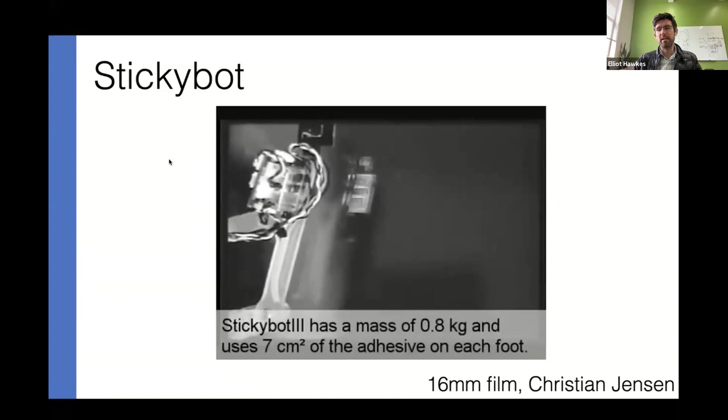So this is StickyBot, and StickyBot is inspired by geckos and their ability to grasp surfaces, and this is where my work began. And here's another version, a little smaller, a little stronger. This is pulling my computer up the wall. But what we realized was that these materials were able to grip in a way that's not normally used in robotic gripping.

So this is a close-up of the gecko-inspired material, where it's this very fine hair-like structure, about 100 microns long, that touches the surface, and when you apply a shear load, it grips the surface. So what's neat about it is that it's different than traditional friction that we're used to using when we do grasping, or most robotic grippers do.

So this is a friction cone here. We have the normal force, which is down, and then the shear force, which is the side. And a friction cone, basically, as you move around like this, you won't slip, and then if you go too far, it'll slip out to the side. But in contrast, you can have a sticky material. This is something that goes below the axis in the normal force, so if you pushed it down, it would actually stick.

And the cool thing about the gecko adhesive is it looks like this. So here what's going on is basically as you apply more shear force side to side, you get adhesion, below the x-axis. And what we realized is from the climbing robots that we saw this behavior, and we thought, well, what could this mean for grasping? This is an interesting material that could enable new types of grasping, and so that's why we got excited by it.

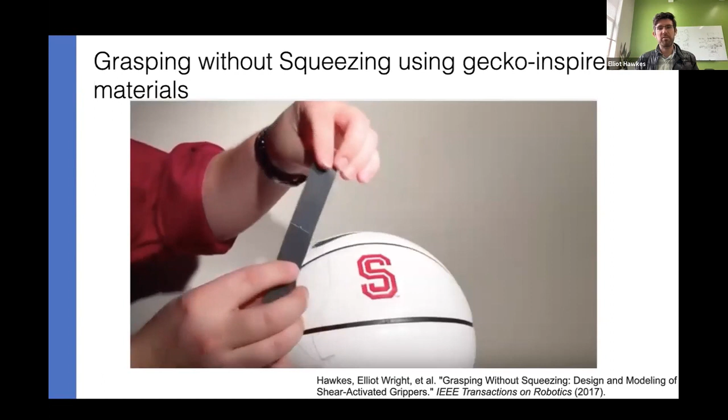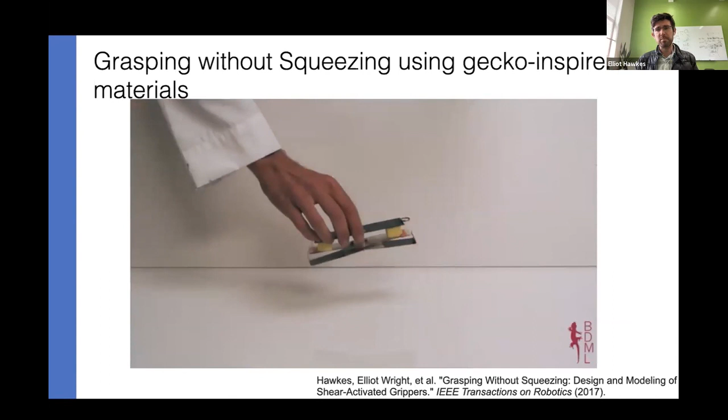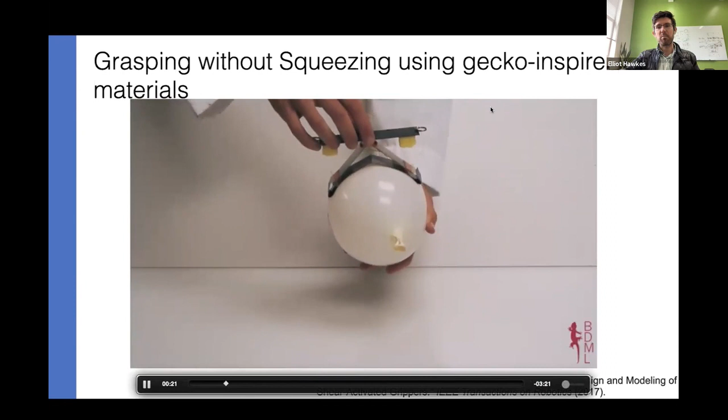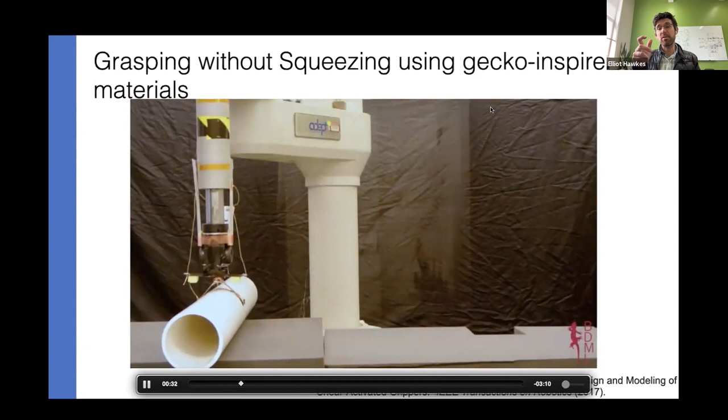Just here's some examples of it in action. It's just a film of it. You can set it on a material, and then when you pull that shear force, it grips, and when you release it, it falls off like that. I'll move on now. I have lots of videos of this thing picking lots of things up, but we'll probably have lots of those for today later on. So maybe I'll stop there. But the key takeaway was that with a new material, the forces enabled in the grasp became different, and that meant we could do things like pick stuff up without really squeezing it, which is kind of cool.

Thanks, Elliot. So Tess, as someone who's been working at the intersection of AI and novel materials for robotics, what do you see as the connection between materials and the data-driven techniques you've been using?

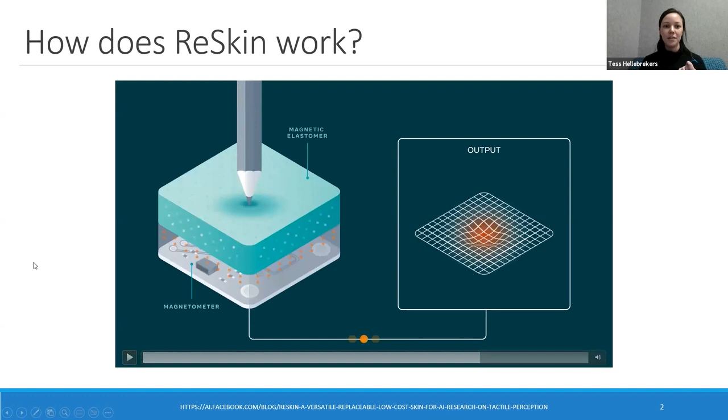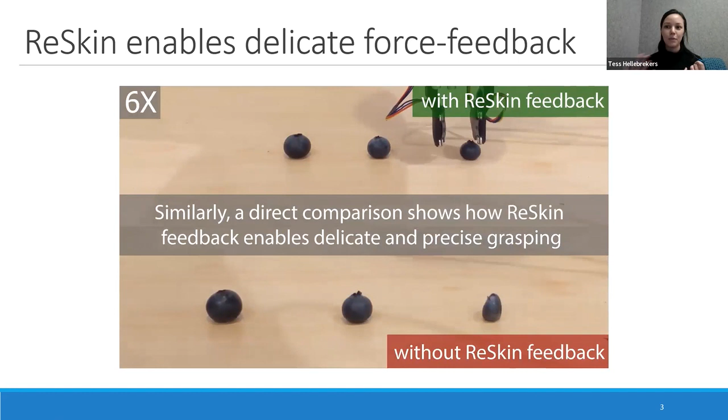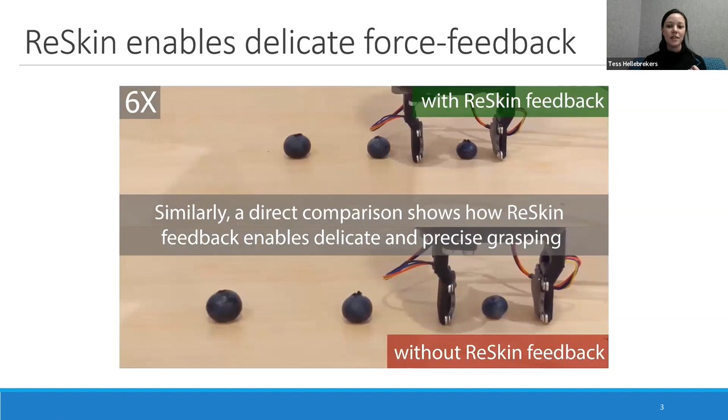Thanks for the intro, Carmel. I've prepared a few slides and videos. I work in soft sensing, and in the last couple years I've narrowed down on magnetic soft sensing. Some of my most recent work, called ReSkin, works by letting deformation of magnetic particles create a unique magnetic flux field. This led me into the data-driven side of things, since there's no closed-form solution for this kind of sensing. We're interested in how we can collect magnetic tactile feedback in robotics, wearables, and unstructured environments, and then use data-driven methods to make sense of it, so we get an interpretable, understandable output from raw sensor signals.

Some of my favorite work happens in a very unstructured way. We know we can put these compliant materials on tons of surfaces, and my next step is figuring out how to interpret all of that data into something useful for our communities.

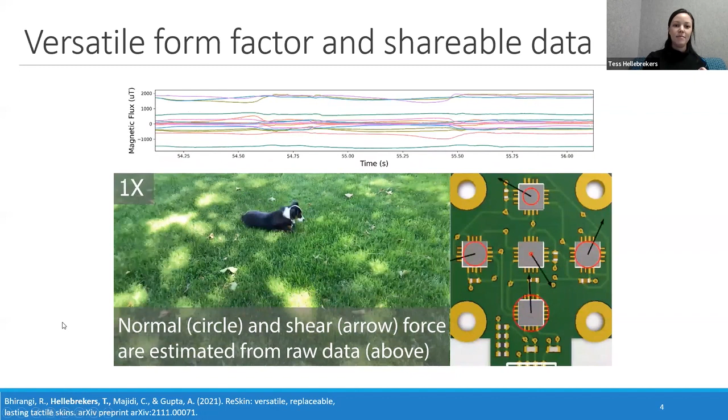Thanks, Tess. It's going to be interesting to share different perspectives on the role of sensing with these soft material systems. Thanks for sharing that.

All right, Nancy, you've been working on a series of soft hand designs, not just for grasping but also for manipulation. I'm curious, from your perspective, what you found to be easy versus hard with manipulation using these soft hands.

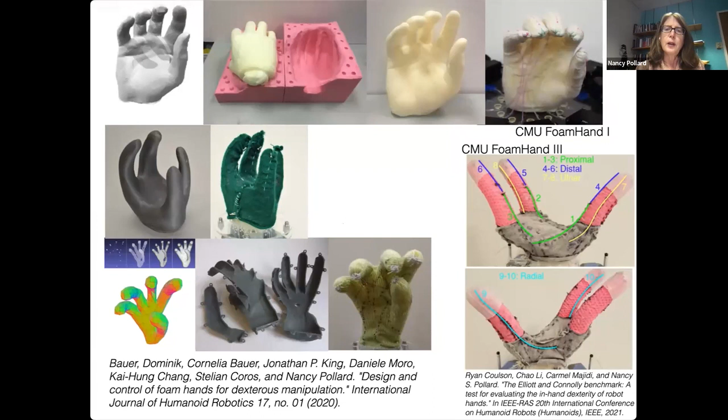Thanks, Carmel, for the introduction and the great question. With our first generation of hands, shown here, made of expanding foam based on a mold system, they were fully solid soft materials. What we found surprisingly easy was creating robust in-hand manipulations. I'll show you a bit of that.

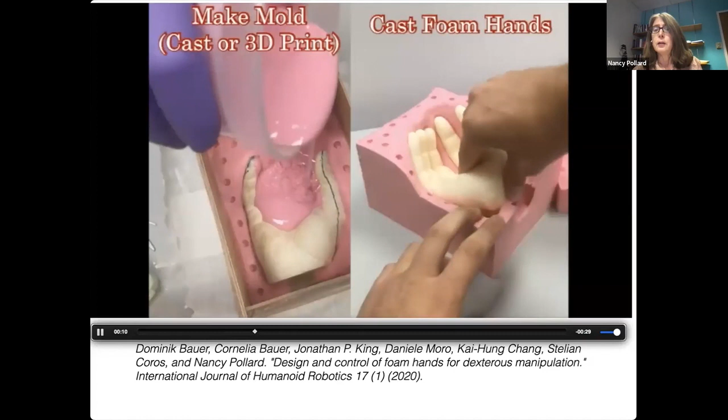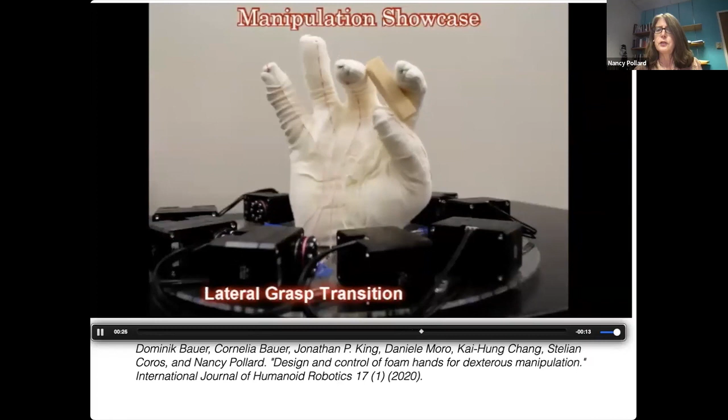It's not just about being able to create the manipulations, but we could change the design of the bodies, change their rest shape, change the tendon layout to make it more human-like than standard robotic designs, using the same foam that might be in your couch. Then we put a glove on it and sewed tendons through that glove. The inherent compliance made it easy to create these grasps and manipulations, since we didn't have to worry about fingers colliding or anything breaking, and interactions with the environment became more robust and secure.

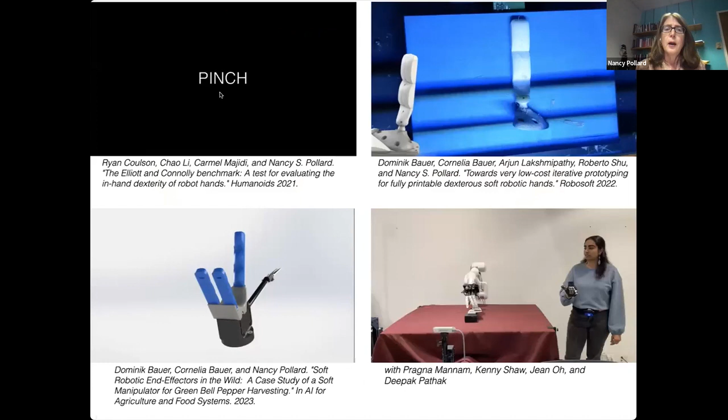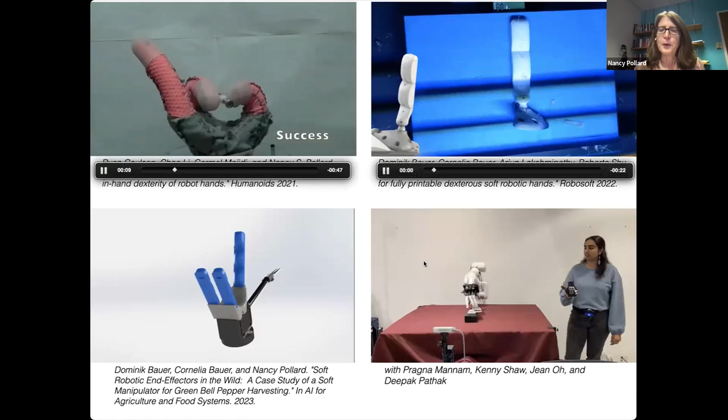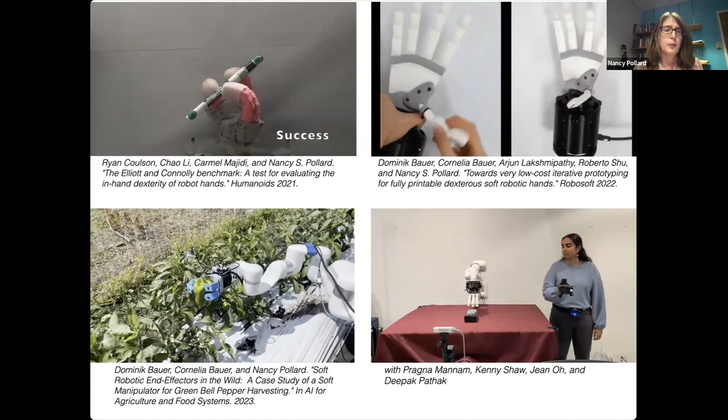Following that, we moved to systematizing this a bit, thinking about benchmarking it—this is work with Carmel and one of his students, so you'll know that one well. Then we moved in a different direction, toward a more rapid design pipeline based on 3D printing, incorporating an almost recognizable joint structure into these hands, with the goal of better controlling the low-stiffness and higher-stiffness directions of motion.

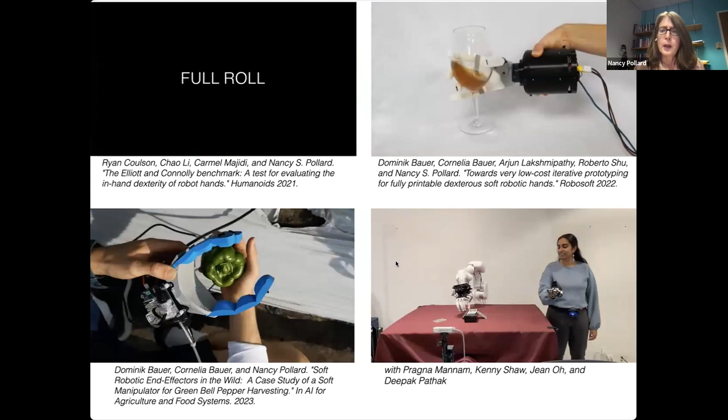This footage in the lower right is from our lab just a few days ago. One of my students, Pragna, has been working with our latest model, which she developed in order to pick cards off a stack. At some point she just started picking them all up and putting them back, freeform experimenting with the hand itself.

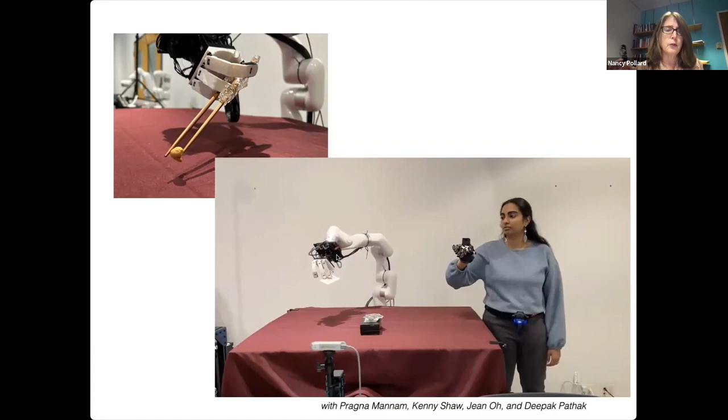This example highlights some of the things that are hard. It shows interesting capabilities because the hand is very dexterous, but at the same time, this intentional fine control of dexterous manipulation is still more difficult than it needs to be.

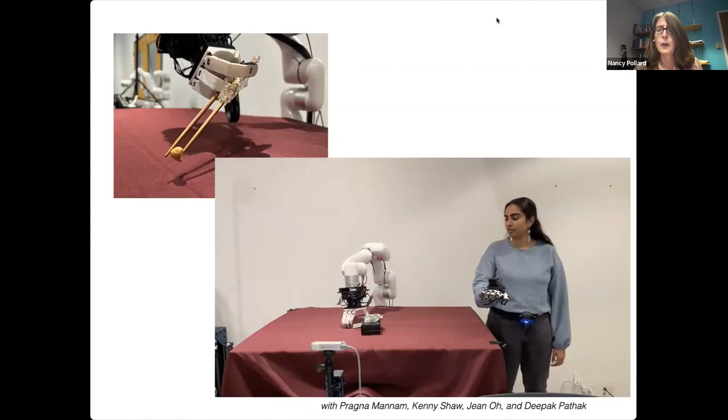And we would love to be able to address this difficulty. Partly, I think that's going to be solved through development and introduction of new materials. With that, I'll hand it back to you.

All right, thanks, Nancy. Really cool to see the iterations on these designs and how they've been evolving over the years. Really awesome stuff.

All right, so Yon, your work covers quite a spectrum. You've done everything from soft robotic systems, grasping manipulation, to really understanding the underlying sensory and motor functions of the natural human hand. So what are some of the architectures that you've been exploring, and how important is it that you replicate some of the characteristics of actual natural hand function?

Sure. And hey, thanks to everybody for putting together this great session. Let me go ahead and share a video that illustrates a few things. We conduct research broadly on haptics, robotics, and some emerging technologies motivated by challenges in each of these areas. Haptics is a core topic of our research.

We work on both fundamental science and engineering design research. Haptics, to me, refers to our capacities for touching, feeling, and manipulating objects in our surroundings. Research over several decades shows that in humans and other animals, touch sensation and motor control are inseparable. In this sense, haptics is central to, or even synonymous with, our abilities to physically interact with our environment.

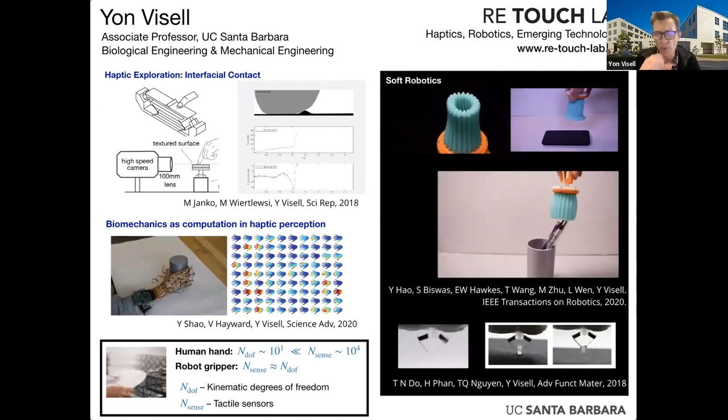In particular, some of our work demonstrates that there's a sense in which biomechanical coupling of soft tissues in the hand implements perceptual processing prior to involvement of the nervous system. We also work on soft robotic and electronic technologies, some informed by human abilities, some by other biological systems, some rather different.

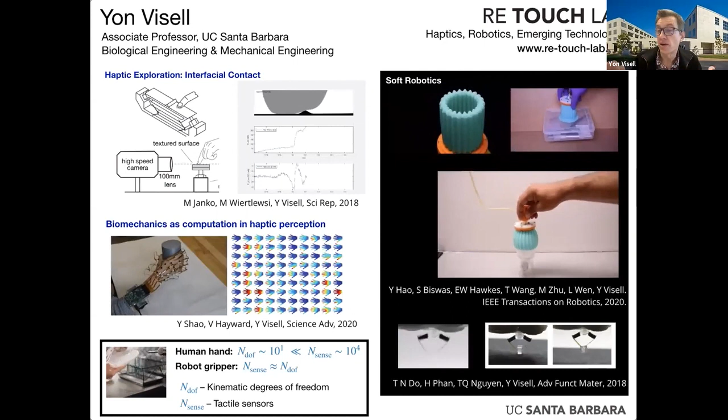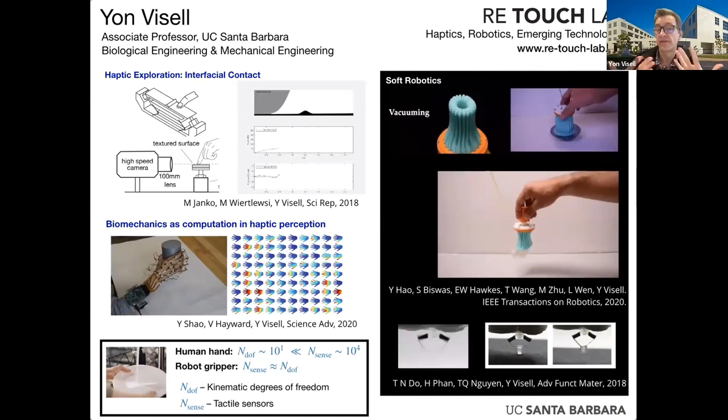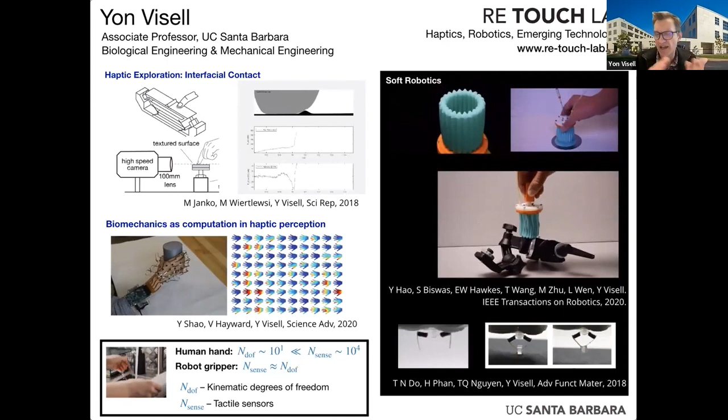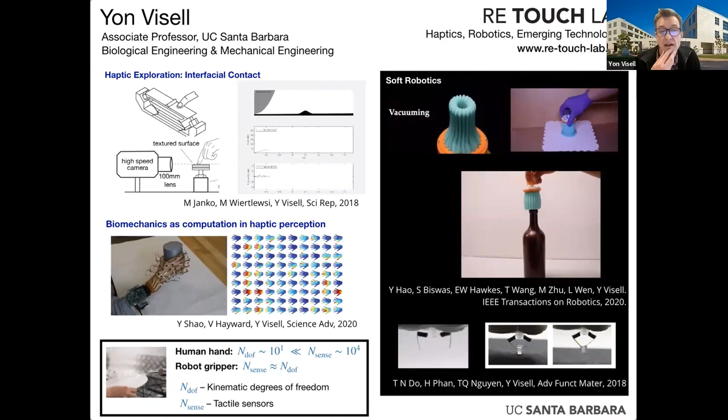The example here shown on the right is a robotic gripper that we reported a few years ago that uses a few different principles, one of which is envelopment. Similar to a few other soft robotic gripping designs or some biological systems, it encloses objects and does so with a really simple mode of control input with a single fluidic port. Nonetheless, we've designed the soft mechanics of this structure, the composition, and the interfacial adhesion, which is enhanced through the use of a kind of gecko-like skin in order to allow it to grasp a lot of things.

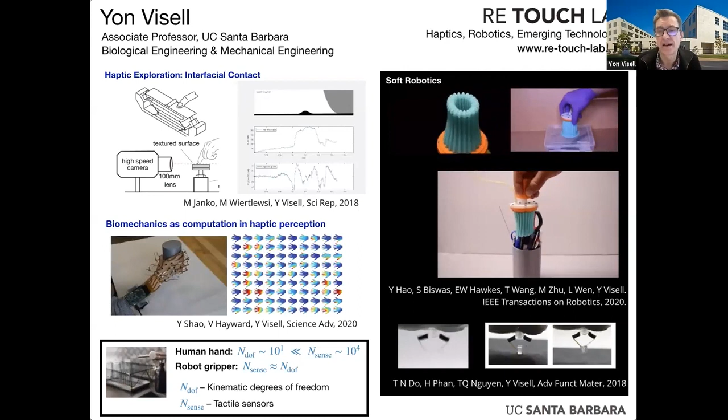We've worked at different scales. There's a kind of miniature, very fast gripping device shown at the bottom. I found this intersection of topics to be really exciting, but there remains the question of whether the attention that we give to the human hand as a model for a generalized gripper is appropriate, or whether that reflects some kind of anthropomorphic bias on our part.

Right, and I think these videos, as with a lot of these intros, give us this sense that there's a lot of different roles of materials and different form factors and overall architectures. You just showed that vacuum type, enveloping or collapsing gripper. Elliot, you showed the gecko-inspired grippers, and Tess, you were looking more on the sensing side. So we're seeing all these different applications of materials.

But maybe to start things off, broadening out this discussion a bit: why new materials? We know that in industrial automation and robotics more generally, parallel plate grippers, suction cups, jaws—those are ubiquitous, incredibly popular. So what new ideas are we really bringing when we start re-examining the types of materials being used? Just to be clear, when I talk about new materials, I mean either utilizing existing materials in new ways, right...